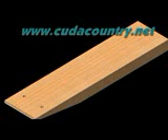Let's get started with a new part file. Come up to the File menu, click New, select Part from the list of templates, and click OK. This will start a new part, and the units will be in inches.

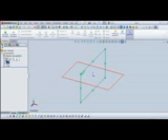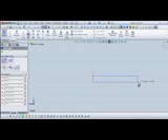I'm going to click the right plane over in the Feature Manager and click Sketch from the toolbar. This will swing us around so we're drawing on the right plane. Come up to the Sketch Tools and select Corner Rectangle. Start the rectangle at the origin. Come down and to the right, sketch out a rectangle, and click.

We're going to dimension quickly with Fully Define, and then simply click OK in the Fully Define Property Manager. This puts on some quick dimensions. We're going to set the height to 0.4 and the length to 6.

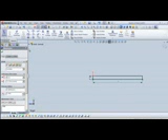Save as. Let's go up to the File menu, click Save As. We'll key in base for the file name and press Enter. Then we're going to take this sketch into a feature.

Let's click Features Toolbar and Extruded Boss Base. Now we want to set the end condition to mid-plane. This is so that the origin is in the middle. If we click, we can see that the extrude is expanding out from the origin. This is important because later we're going to use the right plane as a mate reference.

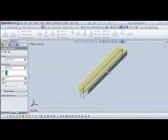Let's key in 1.4 for the depth of our extrude. Press Enter twice and save.

Next we're going to press the F key to fit and chamfer. We'll find chamfer in the Features toolbar, and we're going to set the chamfer to distance. So we'll select distance, set the number 1 distance to 0.3 and the number 2 distance to 2.

And we want full preview selected, and we're going to select the bottom edge, which would be the bottom front edge, and we'll get a preview. So it's going to cut this section right here off the corner. Click OK. So we chamfered the bottom edge.

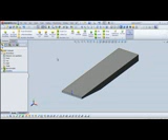Next we'll switch to the top view. In the Features toolbar we'll select Hole Wizard. We're going to make a couple of holes for our screws. So we want to select the hole type.

Scroll down, we want ANSI inch, fractional drill sizes. The size we set to 3/32, blind, and the depth of the hole 0.1.

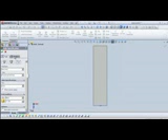Then select the Positions tab up at the top of the Property Manager. Next we're going to come over to the drawing. We're going to click the top of the face twice. It's going to create points. If you want, you can keep the point lined up right there. Then we'll select Fully Define to add some dimensions and click OK.

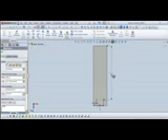We'll set the dimensions. This dimension is going to be 5.4. And this dimension from the edge, 0.3. And this dimension for the second hole is 1.1. So we have 0.3, 1.1 and 5.4.

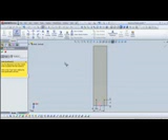Sometimes this dimension doesn't come off of this edge, so I'm going to delete it and show you another possibility that the fully defined might dimension this as 0.6. So same difference. Let's click OK in the Property Manager and save.

Switch to isometric and we'll set the material. So we right click Materials in our Feature Manager, select Edit Material.

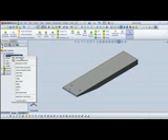Close Steel, expand Woods, and select Cedar. Apply and close. Now the wood grain's running the wrong direction.

So what we need to do is first turn on PhotoWorks. There's a good chance that your PhotoWorks is not turned on. So to turn on PhotoWorks, you come over to the Tools menu, come all the way down to Add-ins.

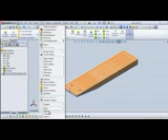And in the Add-ins dialog box, you're going to select PhotoWorks. You're going to check the Active column, and you're going to check the Startup column. So 2 checks, and then click OK. Now we have our PhotoWorks turned on.

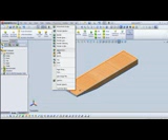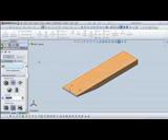So we'll go into the PhotoWorks menu, click Appearance, and over in the Appearance Property Manager, we're going to select Mapping tab, and then scroll down to Rotation. We're going to set the rotation to 90. So you can see our grain direction is rotating with the length of the stock. We'll click OK and save.